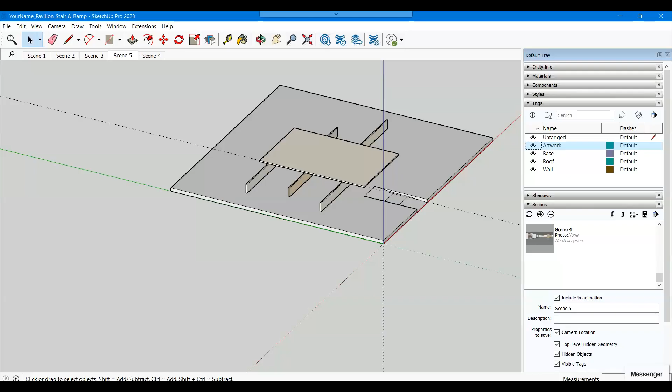In this video, we're going to continue working with the vertical circulation. I've already got the ramp cut in here, and now I'm going to work on getting a stair. My plan is to bring the stair in over here on this side.

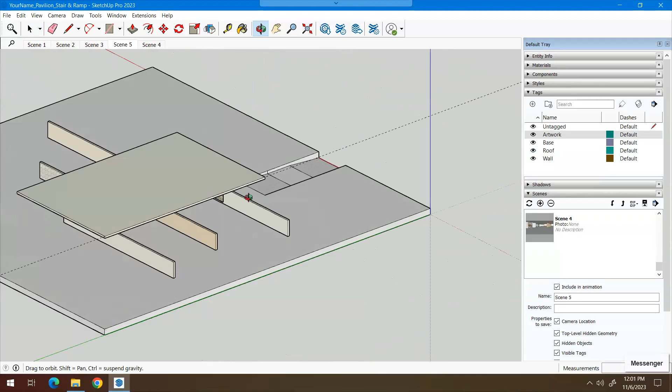So what I'm going to need to do first to get things set up is take some measurements. But I've noticed that the roof overhang is greater on this side than over here, and so I want to pull it out a little bit further.

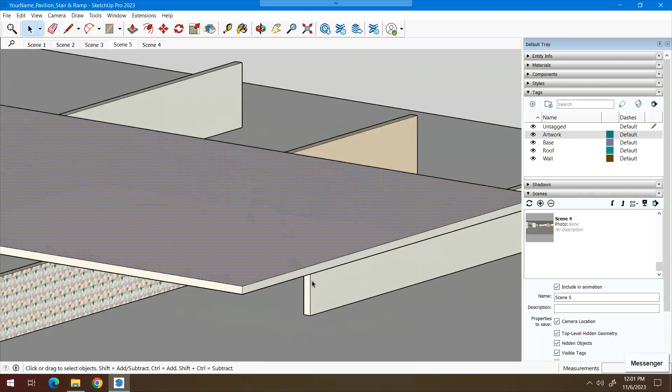So what I'm going to do here, I already clicked on the roof plane and exploded it. This isn't something you necessarily need to do, but you could if you wanted to. I'm going to use the press pull, pick this surface over here. Start over here, press pull, pick the surface, and then extend it out about 10 feet.

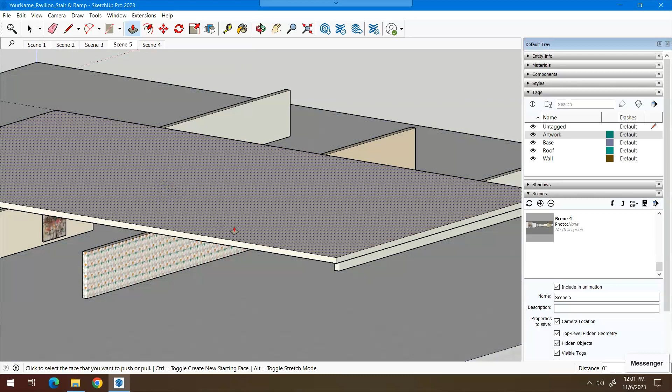I've got a cantilever on both sides. At some point, I'll need to regroup this and put it on the roof tag. But for the time being, I'm going to proceed with working on the stair.

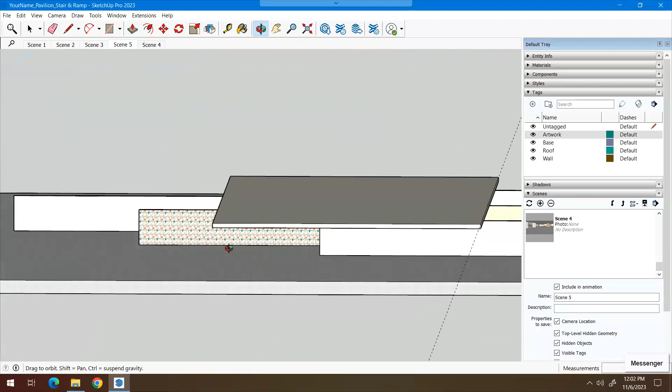One thing you'll want to do, similar to the work on the ramp, is develop a plan first and take some measurements about where you want to locate your stair. I'm going to have it be basically as wide as this overhang is in this direction, and I'm going to make it start just at the face, just right below the edge of the roof.

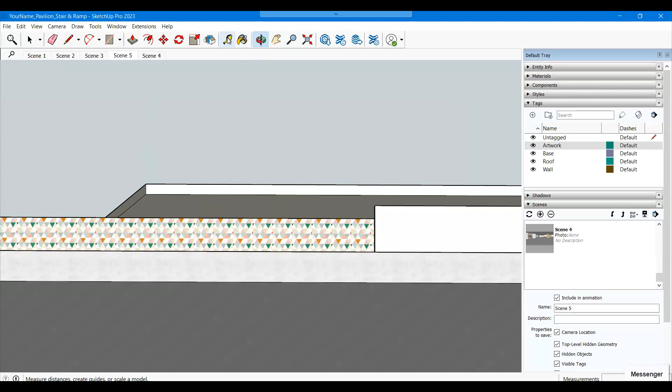Similar to the way I did it before, to get some measurements I tilted it to the underside. I'm going to use the tape measure. I want to know how far it is from this wall to the edge here.

24 feet 7.5 inches. I'm going to write that down. And I also want to know how far the roof edge is from the edge here. I think I might need to take two measurements for this part.

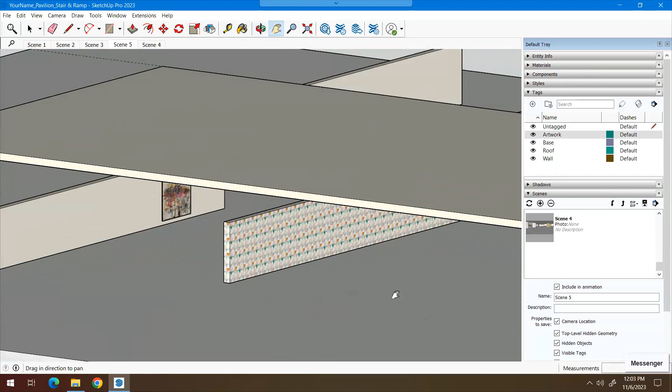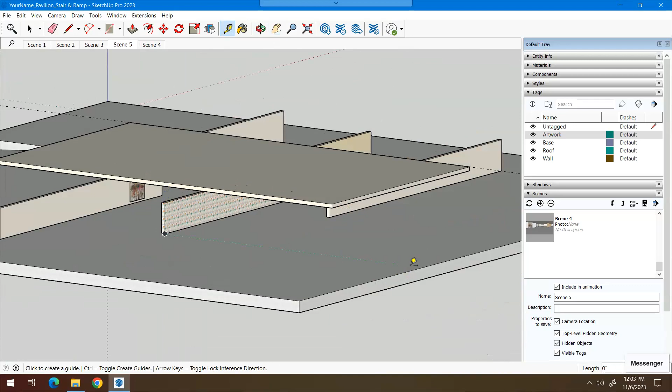Let's try to get from the top of the wall here to the edge of the roof: 40 feet 2 inches. And then from this point over to the edge of the roof: 82 feet 4 inches. So that means from the edge of my roof to the edge of the platform, I have 42 feet 2 inches to work with.

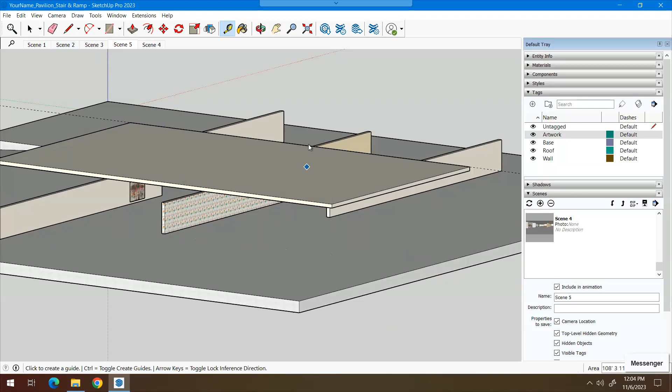Now I can start to add a few lines to help me get the positioning of the stair in place. So I'll use a line from here to here, and a line from here. That one is going to be 24 feet 5 inches.

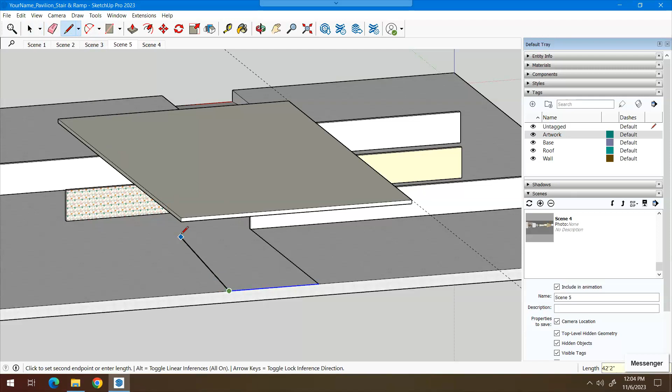See, did it create that line? Sometimes it's hard to see that. And then from the end point here, I'm going to go back 42 feet 2 inches, and come back over the one I started with, and then click on it and delete it. All right, so now I have a rectangle drawn in here.

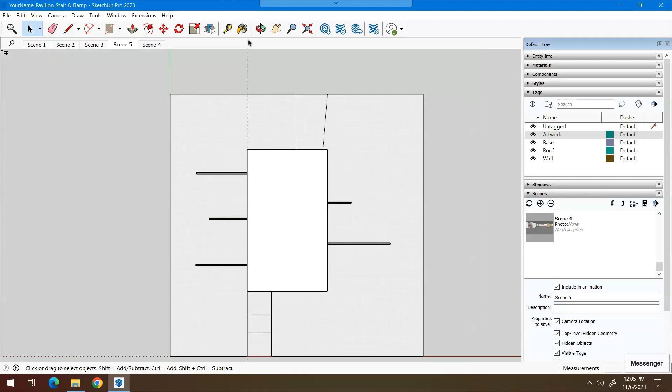Let's take a look at it from the top view. As you can see, it has some kind of angle to it, so I need to make that correction. I'm going to just click on it and delete it, and then go back to that side and repeat my process and try to figure out what it is I did incorrectly.

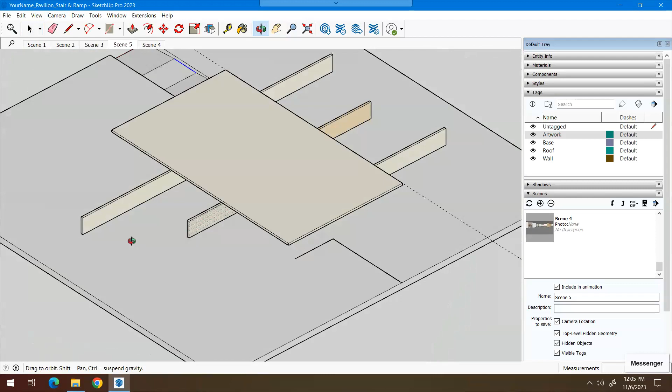Let's do this camera standard. Okay, so I think this line must be incorrect as well. Let's do another line, and again there should be a line in here. Let's just verify that it's still there. I don't see it. May have trimmed it. I'm going to delete. Oops, delete that, let's see here.

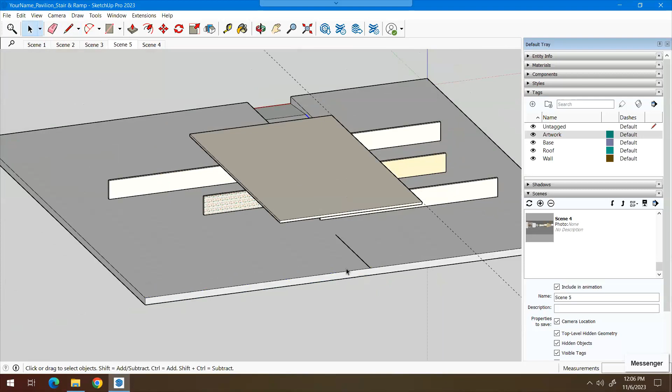Do another line, 24 feet 7.5 inches. Now let's check if the line is there. Yes, it is. Let's draw another line here.

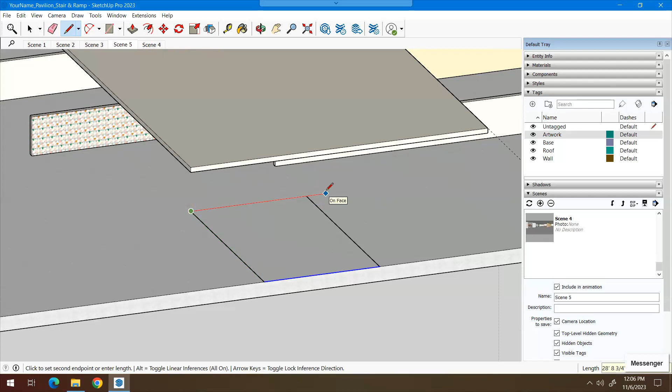And this time I'm going to be more careful in watching that it's on axis, 42 feet 2 inches, and back here. Now I'm a little concerned that this line is incorrect, so let's just reconstruct it to make sure. We'll do a line, and again I'm going to be careful to watch the axes.

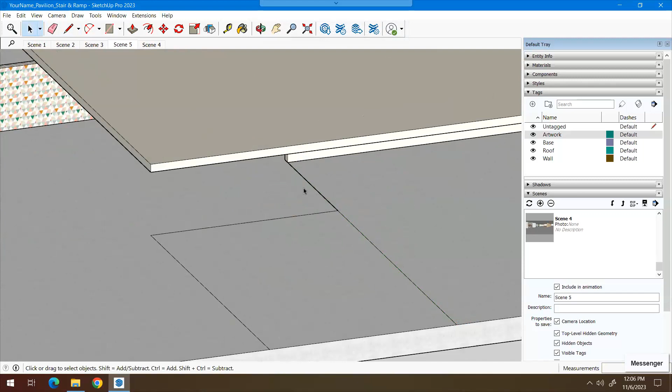Now I should be able to simply move it, and then I'll be ready to do the push pull. It is right here, and 36 inches is the depth of it. So there we go, we have a little slot ready to receive the stair.

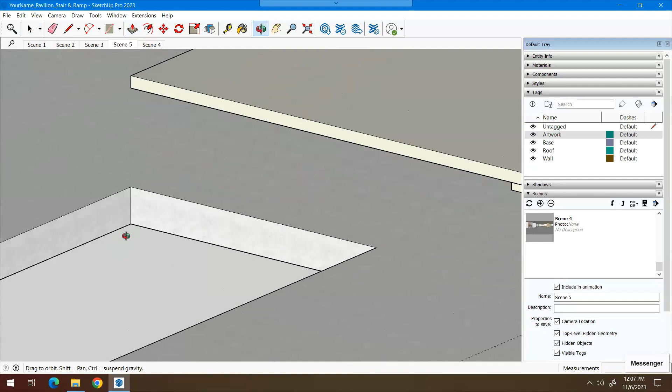Okay, now I'm going to build the profile of the stair in this corner right here. I'm going to use the line tools for this. One thing to keep in mind, there's always one less tread than there is a riser. This top surface right here is going to be my first riser. So if this is 36 inches and my riser is 6 inches, I basically need to start by going up 30 inches.

There it is, and then I'll start to build the profiles of each step. 12 inches is my tread, and just be careful to make sure that you're staying on axes. Up and down till you make your way all the way to the bottom surface.

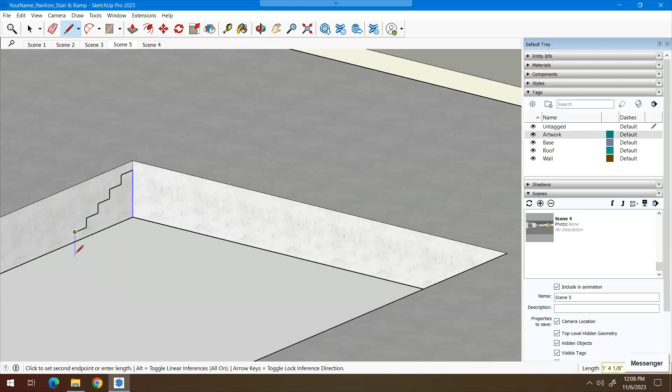Okay, now I think I just need one line here. And with this closed set of lines, I should be able to use the push pull tool to bring it across to the other side, down here.

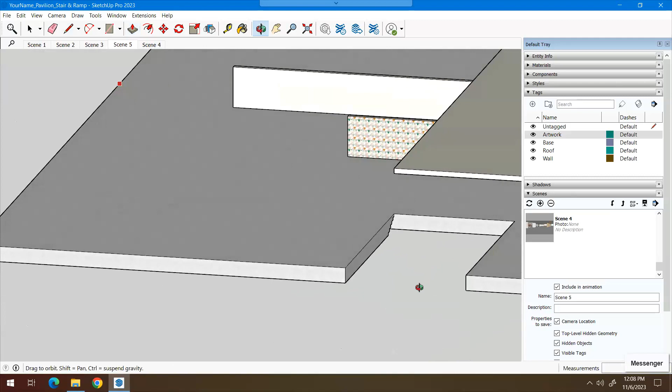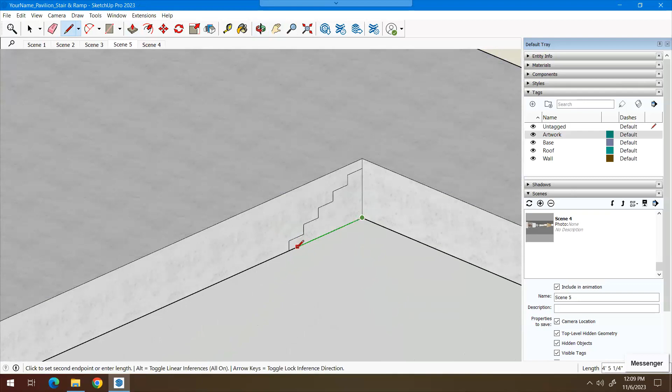For some reason I lost a bit of what I was working on there, so let's finish this off again and bring it back. Push pull, there we go.

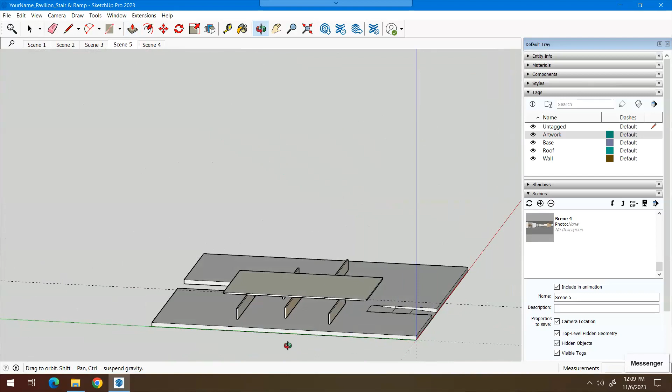And I'll just bring it over here, and then I'll check to make sure it went where it's supposed to. Yes, it did. Okay, so there's my stair, and I have my ramp. That concludes at least the addition of those two vertical circulation components to the SketchUp model.